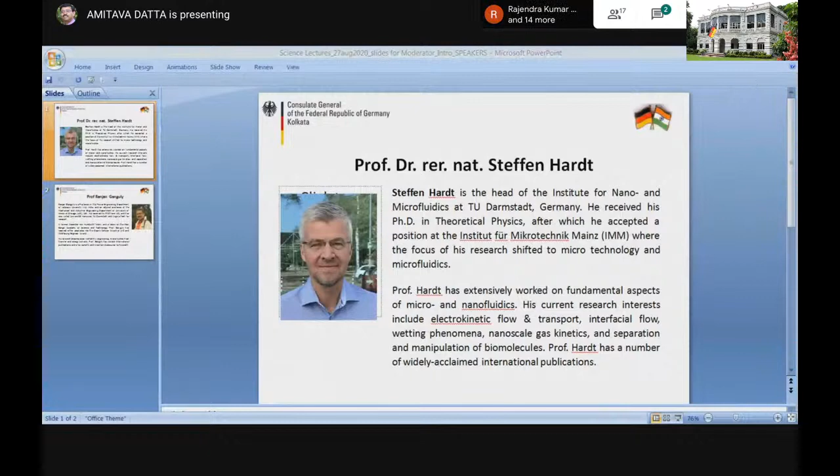Thank you very much for the introduction, and thanks to the organizers for inviting me to give one of the science lectures. I will start right away with my presentation, which is basically on fundamental aspects of surface tension. So let me do that now.

Okay. You should be able to see my presentation now. Is that visible? Yes. Very good. So I will start right away.

This is part one of the presentation, which is more about fundamentals. It's entitled Intriguing Effects Related to Surface Tension. Hopefully these effects are intriguing, and I will start by giving you some fundamentals about the physics of surface tension.

So how does surface tension come about on a molecular level? Imagine a molecule sitting in the bulk of the liquid. It has a number of interaction partners and attractive interactions with them. Compare that to a molecule sitting at the surface, which has less interaction, fewer attractive interactions with molecules, simply because it has fewer neighbors. This means you need to invest potential energy to bring a molecule from the bulk of the liquid to the surface. So a molecule at the surface has a higher potential energy compared to a molecule in the bulk.

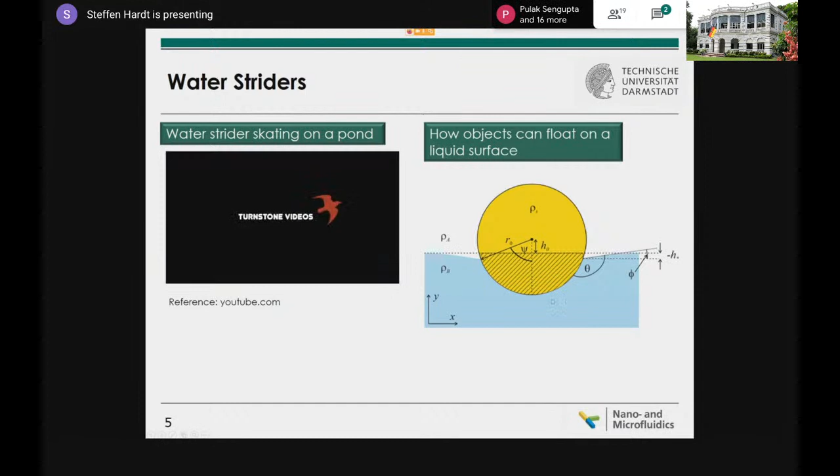This is basically a balance of three different forces. This is the gravitational force pulling the cylinder down. Then there's a buoyancy force - every body immersed in a liquid experiences a buoyancy force, this is force number two. Force number three, the main force here, is the surface tension force. It acts along the gas-liquid interface, pulling along this line which is tangential to the gas-liquid interface.

Because of the normal component in the y direction of this force, this body can float. This is actually what the water strider makes use of. But if you look at his legs more closely, he's a little bit more tricky than what that simple physics suggests.

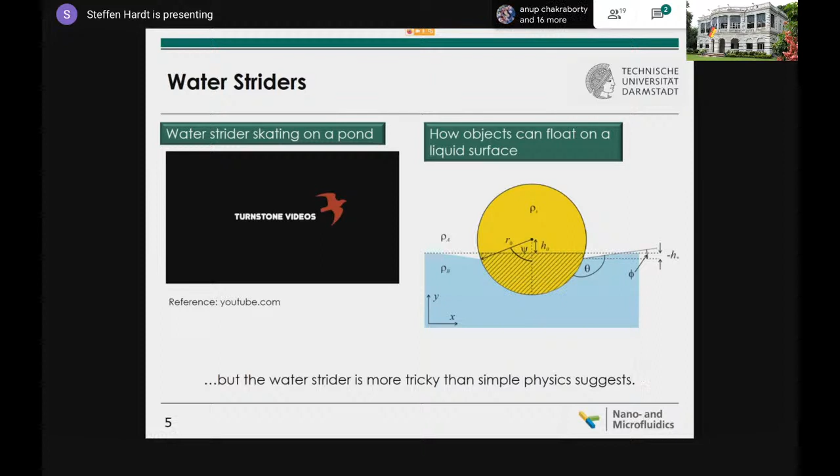For small animals, and for insects especially, it's really important to keep dry. If they are immersed in water, which can easily happen because of surface tension forces pulling them into a droplet, this can be fatal. So establishing mechanisms through millions of years of evolution to keep dry is really important for them. Quite recently, five years ago, there was a very nice publication on surface tension effects related to the legs of the water strider.

These authors took microscopic images of water condensation on the hairs of the legs of water striders. I'll play that video now—what you basically see is humid air, and from that humid air you see condensation of water droplets.

First, there's condensation at the tips of these small hairs, and then, because of surface tension forces, these drops get pulled down to the base of the hairs. But then you see something amazing—let's play that video.

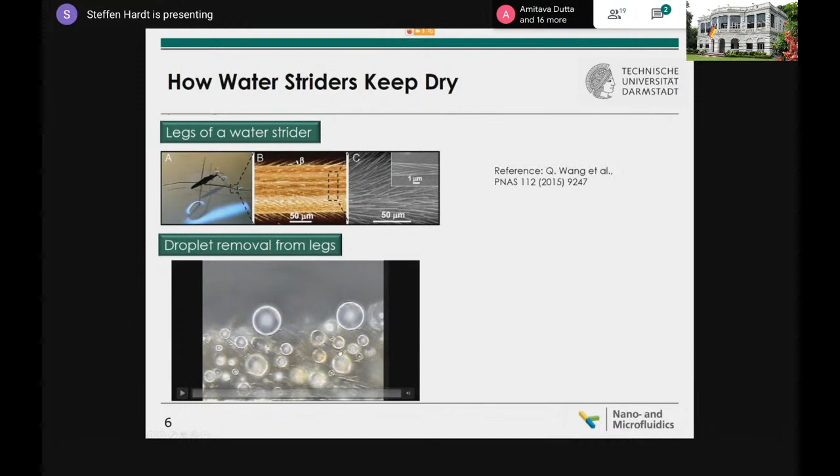So condensation—these small drops get pulled down, but then you see these larger drops grow and grow, and these larger drops get expelled from the forest of hairs. Let's play that again: small drops condensing, growing to be larger drops, and then getting expelled from the forest of hairs.

Why is that? What is the physical mechanism behind it? You can explain the physics like this: there are some drops, and this is a droplet that already gets expelled—it comes from the base of these hairs. When this droplet grows because of condensation, it accumulates more and more water.

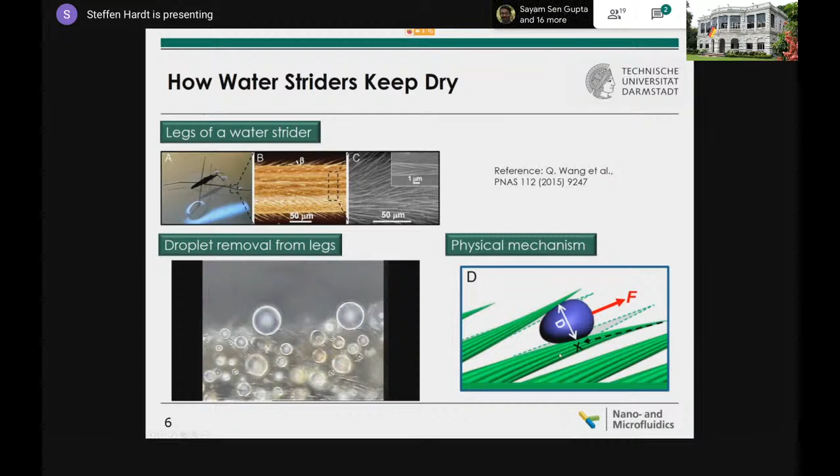Then the growing droplet would actually displace these hairs, and when they get pushed away, they form these conical structures, these conical bundles of hairs. Now imagine a droplet sitting between such conical bundles, with a surface tension force pushing that droplet out, because the curvature on this side is larger than the curvature on the other side.

Remember, the Young-Laplace equation tells you that because the curvature is larger here—meaning the radius of curvature is smaller here compared to there—the pressure here is higher. So the droplet is going to be pushed out, and this is exactly what a water strider likes, because it wants to keep dry.

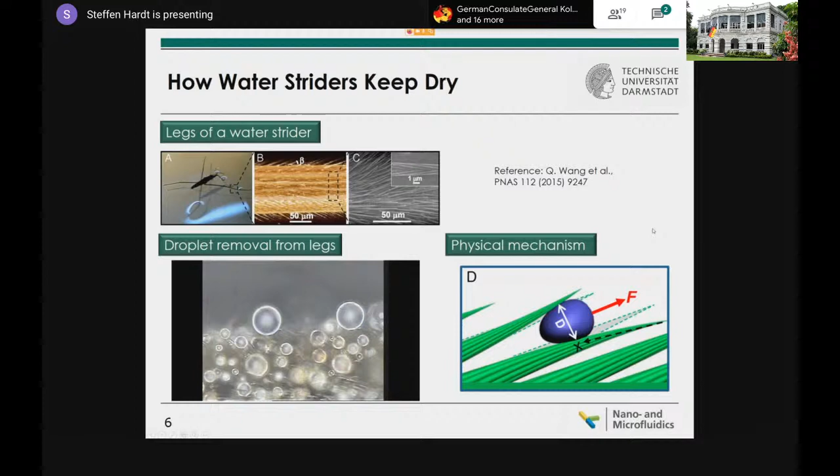So that's one of many examples of natural surfaces that occur in nature with interesting wetting properties. Definitely the most famous example of these nature-inspired surfaces is the surface of a lotus leaf.

As a result, as you all know, the lotus leaf is really good at making water droplets roll off from its surface—droplets roll off really easily. This is biologically beneficial, keeping these leaves from getting wet, and this is actually found for many other types of leaves as well, though the lotus leaf is a particularly nice example.

So this headline tells you 'nature-inspired surfaces.' What does that mean? Basically, around 30 years ago, scientists and engineers thought: why not copy this?

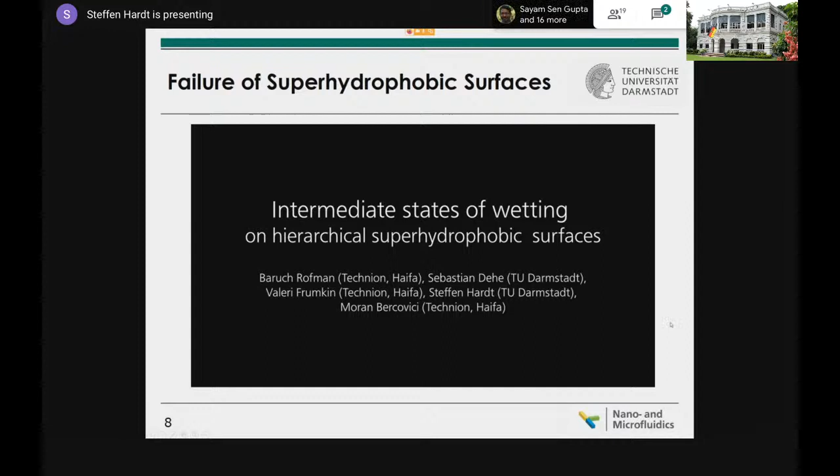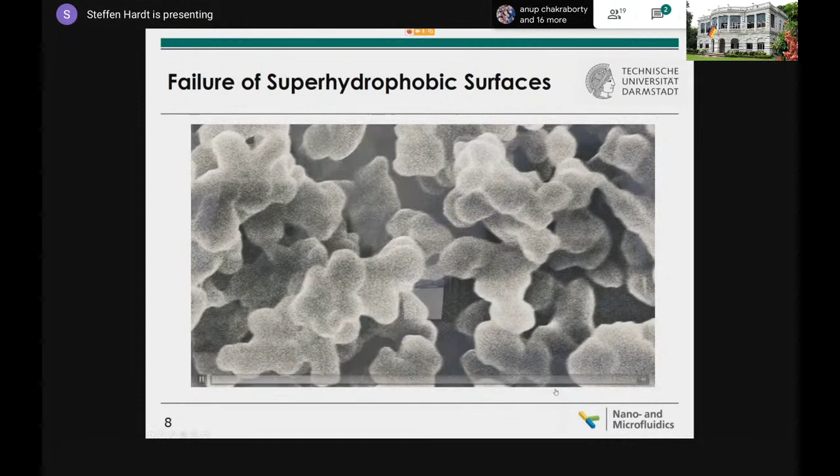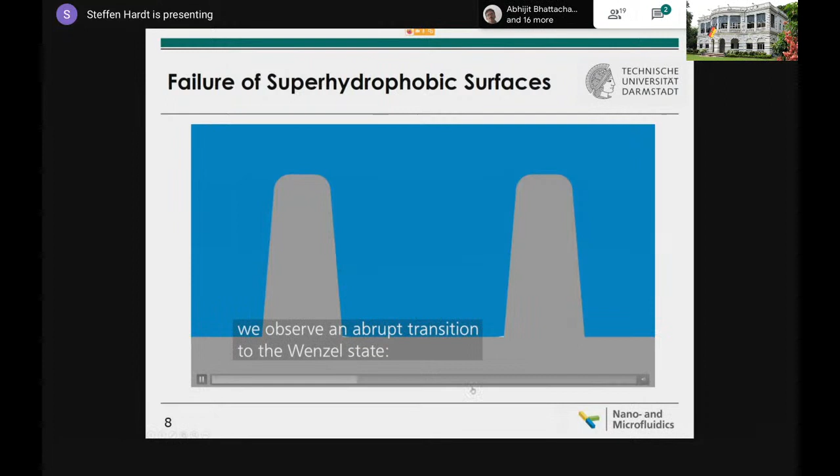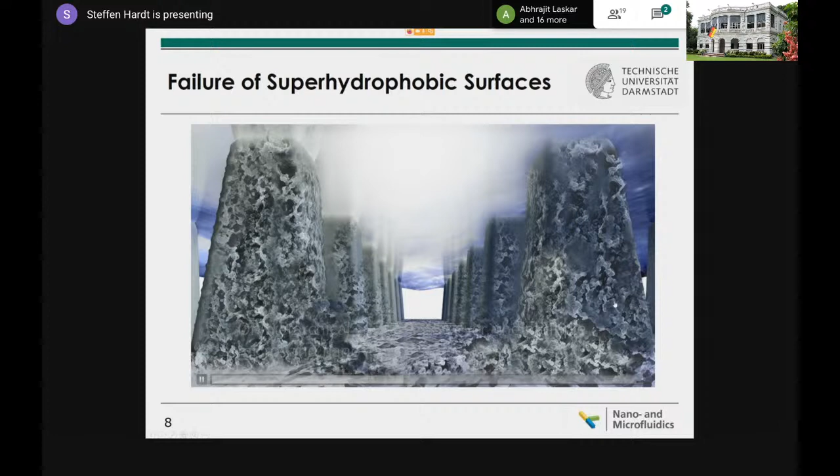We use electric forces for this, though it doesn't matter what type of force you use—you can also use mechanical forces. Using electric forces, you can induce the so-called Cassie to Wenzel transition. This is a surface without nanoparticles, and what you see is the transition to a Wenzel state. It occurs rapidly and everywhere.

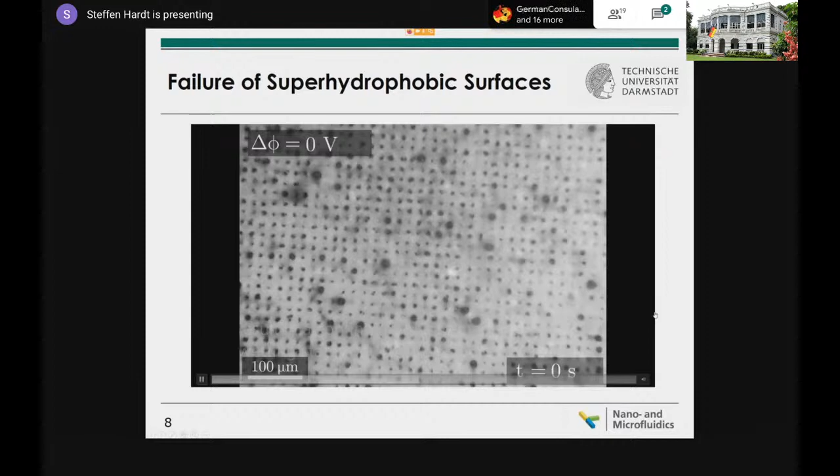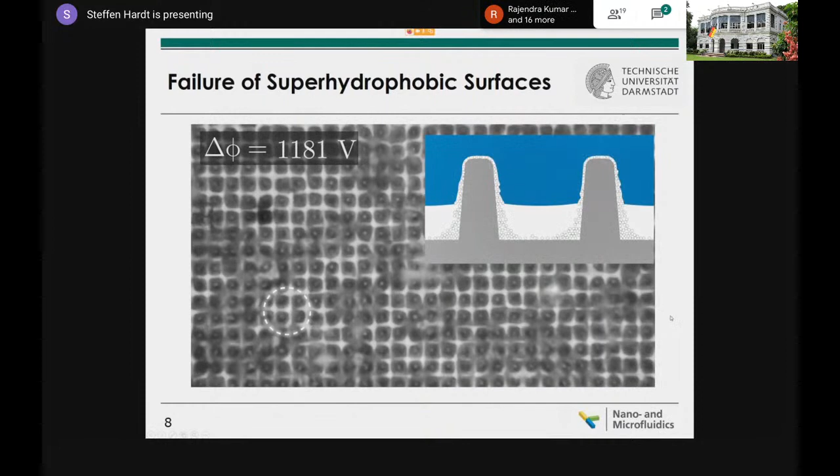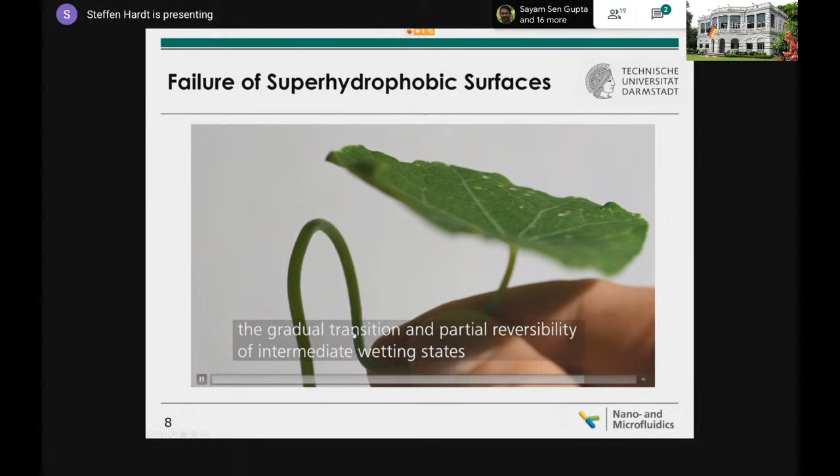Now compare it to the decorated structure—the transition is totally different. It occurs locally, and the most interesting thing is you can reverse it, at least partially. You switch off the voltage and it goes back to the original state, which is really beneficial. For the undecorated surface without nanoparticles, this wouldn't happen. So these surfaces are much more robust—if you want a surface that is mechanically stable with respect to this Cassie to Wenzel wetting transition, you better decorate it with nanoparticles, giving a hierarchical surface that is reversible, as shown here.

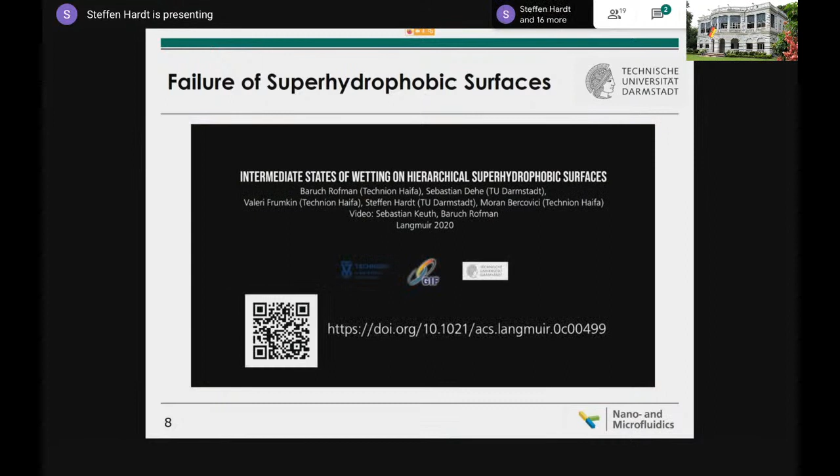The Cassie state is what you need if you want a droplet to roll off easily. This has been published in Langmuir quite recently, so if you want to read the paper, I would be happy about that.

But this doesn't solve all problems. If you want to render a surface mechanically stable with respect to the Cassie to Wenzel transition—again, you want to avoid the Wenzel state—usually you can employ nanostructures. In our case it was micropillars decorated with nanoparticles, but you can also nanostructure a surface right away, for example a surface consisting of nanopillars, as shown in that image.

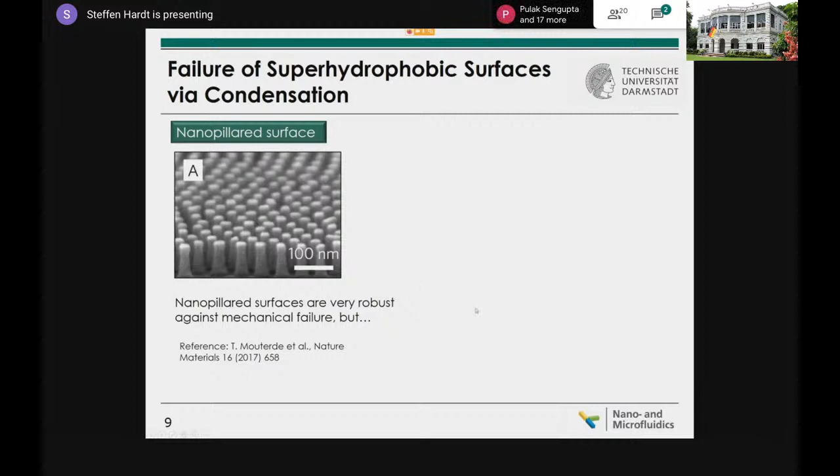Then you can look at the failure modes of that surface. Again, you want to avoid wetting of the interstitials. But there's a different mechanism that can induce wetting of the interstitials: condensation. Imagine you bring a warm or hot droplet onto that surface—there's a temperature gradient, a temperature difference between the liquid and the surface.

Or you can also imagine that you cool your surface. You have a droplet at room temperature and you cool your surface. So what will happen then?

Remember what the water strider did. It had hairs on its legs that could form conical structures. Imagine now you have a surface like that, no longer flat but with conical nanostructures. Similar to the water strider, we'd expect a droplet can be expelled from the interstitials because of surface tension forces, building up a high pressure that expels droplets from the surface.

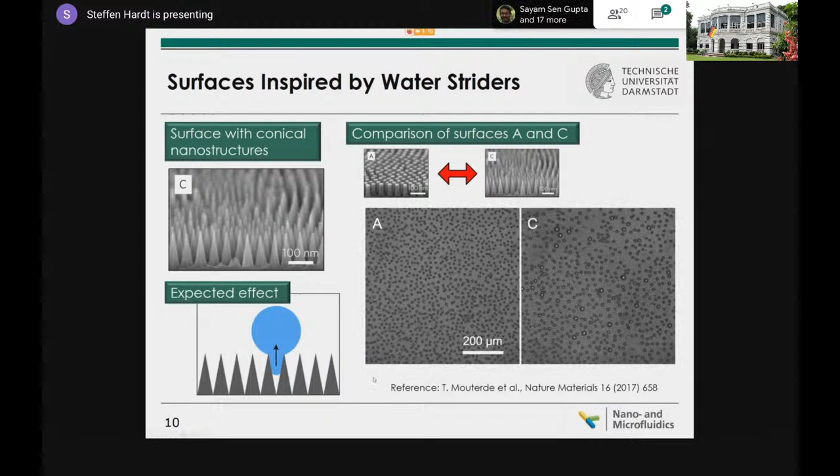Now you can do a test, an experiment comparing this surface, surface A, to surface C, where you let liquid condense on the surface. You can imagine a droplet at room temperature and you cool down the surface, and then see what happens. Surface A is the normal nanopillars, and these are the cones. You see distinct differences between these two images.

The most distinct difference, if we let this video play a bit longer, is that you don't develop larger droplets here. When these droplets reach a certain size, they become expelled from the conical nanostructures just because of this effect. And here, where you don't have conical nanostructures, droplets can grow to a very large size.

So if you want to keep a surface dry, just like the surface of the legs of a water strider, it's a good idea to have conical nanostructures. In the case of the water strider, these conical or microstructures are formed dynamically.

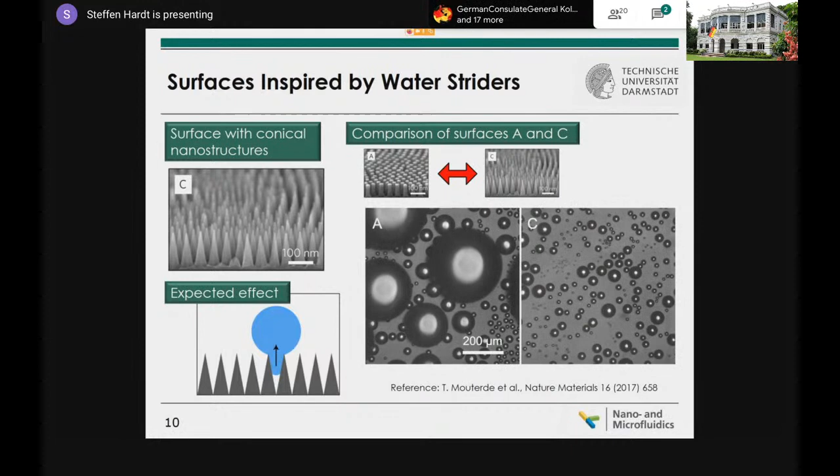Okay, I think that's quite intriguing. So far I have more or less assumed a single component liquid. I haven't talked about liquid mixtures or something like that. Now let's look at what can happen in terms of surface tension if you have a liquid mixture.

So you have a container filled with a mixture of liquid, and it's not really mixed. You have one component here and another component there. Let's imagine these two different liquids, say alcohol and water, have different surface tension. So when we look at a point at the liquid surface, you can imagine that the surface tension pulls on that point.

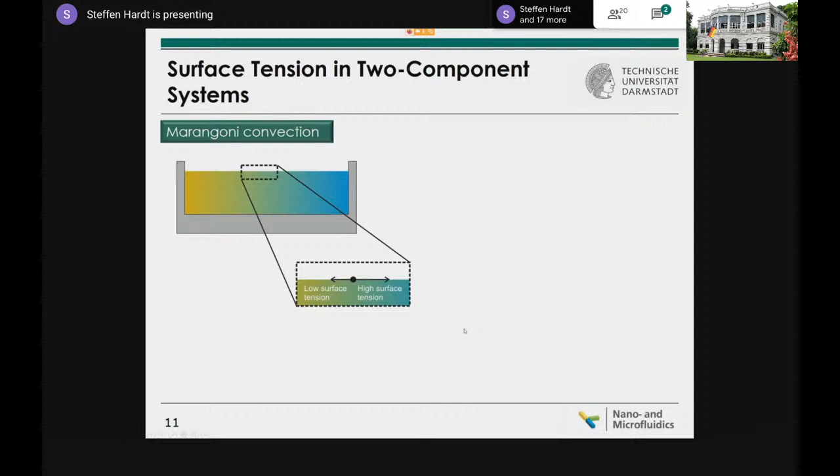This is the point we consider now. There's a large pull to the right because of high surface tension, and a small pull to the left, which means there's a net force on this point, and this net force will actually displace liquid. It induces a liquid flow, and that flow is called Marangoni convection, which is really observed.

Basically, the liquid will go to the regions of higher surface tension, and it's well known that you can do that in two different ways. You can have Marangoni effects based on concentration gradients, which is what I show you here, but also temperature gradients work as well.

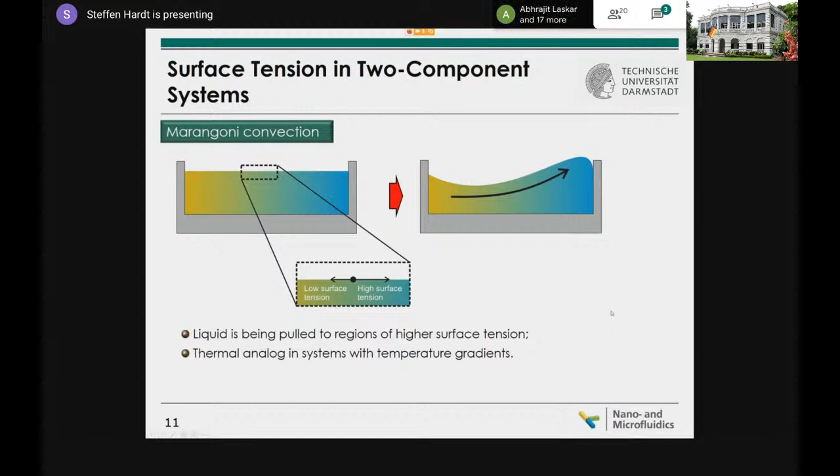This is related to an effect some of you have probably observed. For those who enjoy alcoholic beverages, you've perhaps recognized this tears of wine effect. When you have an alcoholic beverage with alcohol content maybe between 15 and 20%, close to the optimal alcohol content, you can sometimes observe this: you have a glass with an alcoholic beverage, you somehow wet the walls of that glass, and then you observe tears running down. These are tears of wine, and they are caused by the Marangoni stresses, the Marangoni convection effect.

What is the physical explanation of that? It goes like this: first, the wall is wetted here, and there's preferential evaporation of the liquid mixture close to the three-phase contact line. If you have an alcohol-water mixture, because alcohol evaporates more easily than water, you get enrichment of water here, so you have a higher concentration of water close to the contact line compared to the bulk.

This induces a pull, the same mechanism as on the slide before, so liquid is being pulled up. When liquid is pulled up continuously, it forms these bulges. Then the liquid remembers that there's actually gravity, which pulls these tears down, and this appears as tears. This is called the tears of wine effect, caused by Marangoni convection, Marangoni stresses.

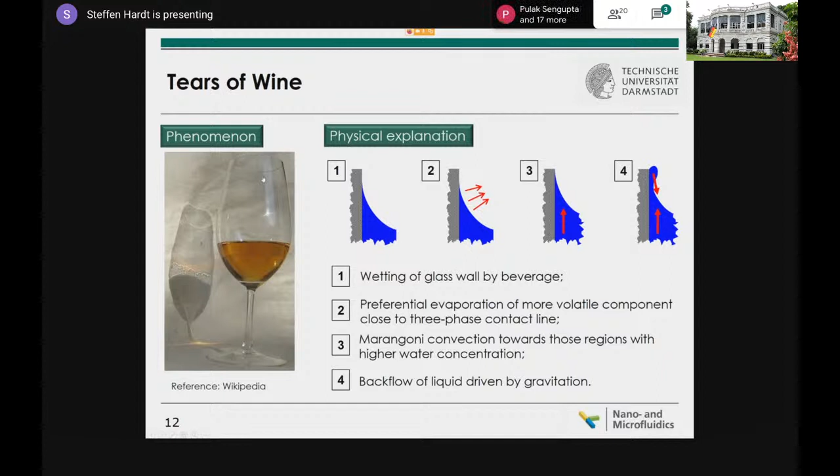What we did in our lab, we looked at this tears of wine effect under confinement. Imagine you shrink the diameter of this glass to 1 millimeter - we wanted to see what happens then.

This is our glass here, and to make this effect more pronounced, we have a mixture of alcohol and water in some pool. We dip a capillary with inner diameter around 1 millimeter, sometimes a little smaller, into the mixture, and we have a heating block ramping the temperature up to 80-something degrees, giving uniform temperature here. Then we observe really funny phenomena.

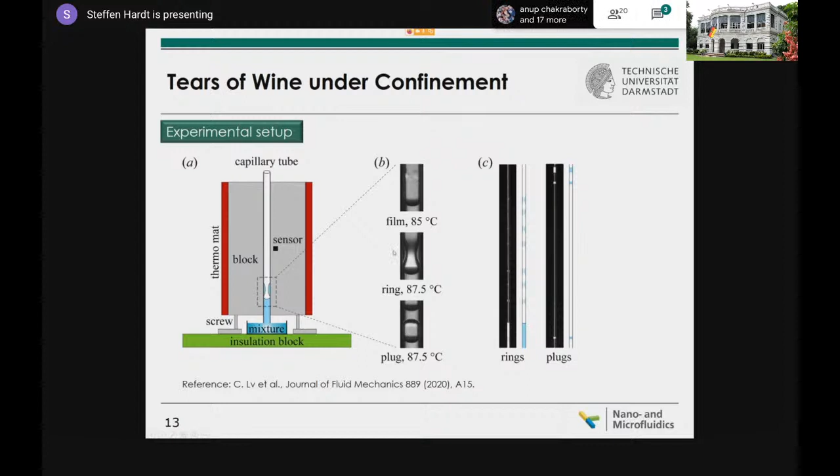In some cases we observe liquid rings here, similar to the liquid ring you saw on my second slide, and sometimes we observe liquid plugs. We sometimes see that a liquid ring transforms into a liquid plug.

What happens then, finally, I will show you in this video. This is a liquid ring here - you see it, with the meniscus oscillating a bit. Then suddenly you see that this liquid ring collapses and moves up. We have really analyzed it quite deeply - it collapses because the solution of the Young-Laplace equation has a stability limit, becoming unstable when a certain volume is exceeded.

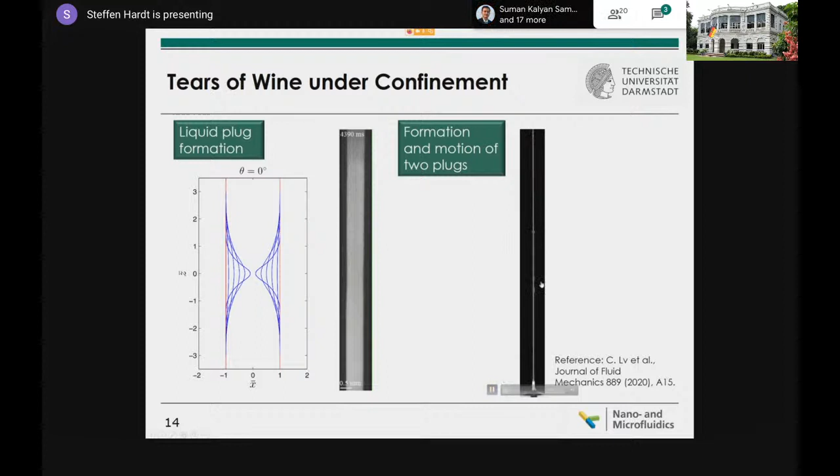If you look at the whole capillary, you can see quite funny effects, though it's a bit difficult to see because these liquid rings are really tiny - but let's play that video. You see one liquid ring here, one there, and then these liquid rings transform into plugs. These plugs move up because of evaporation, since there's gas or vapor generated here, and this pushes these rings out. So tears of wine under confinement is a completely different effect compared to the usual tears of wine in a macroscopic glass. This is also published - recent work we published in Journal of Fluid Mechanics this year.

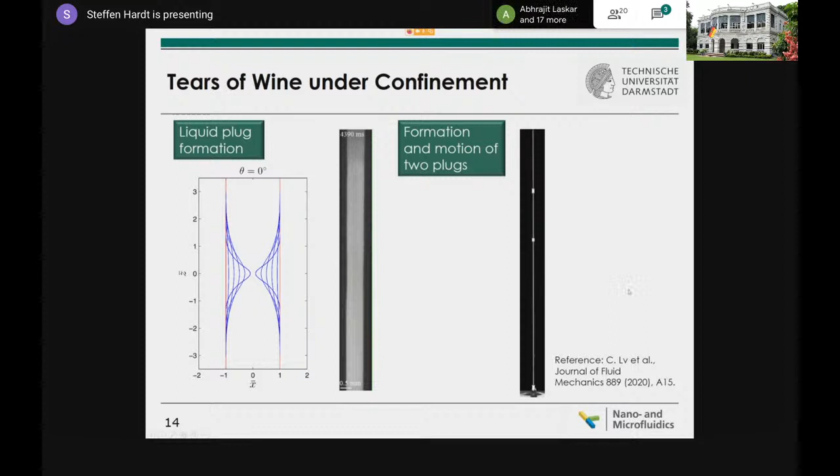This brings me to my conclusions and outlook. These are quite general conclusions: surface tension is ubiquitous in nature, but not only in nature, also in industrial processes and future industrial applications - Ranjan Ganguly will tell you more about why surface tension is an effect we can really exploit. But also in terms of science, if you look at the history of science, many important scientific developments are in some way related to surface tension. You would expect that since the Young-Laplace equation is 200 years old, this might be an old-fashioned research area. It's really not, because a large number of interesting results and developments date back to the past few decades.

There are also a lot of open scientific questions in which surface tension plays a role, also in our lab. For example, what I showed you, tears of wine under confinement, is something we discovered quite recently. I think nobody knew about that before.

So if you want to enter this research area, I think it's still a modern research field, even if the foundations are already 200 years old or so. And it relates to applications. A better understanding of surface tension related phenomena is key to a number of emerging technologies, and established technologies. This will be conveyed to you by Professor Ranjan Ganguly in part 2 of this presentation.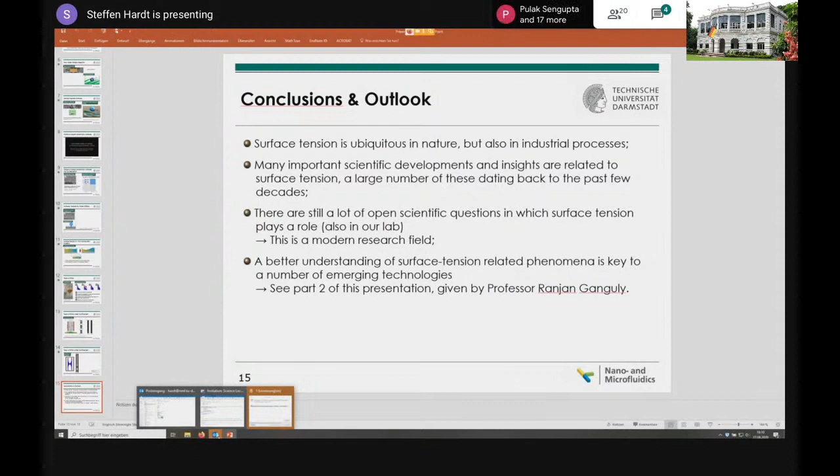Thanks a lot. Thank you, Steffen, for the nice presentation. You have shown some of the beautiful phenomena that happen in nature, like why beads form on the lotus leaf, and how water striders move on water, they walk on water. You have also shown the importance of the surface structure, presence of nanostructure or microstructure. These are very interesting.

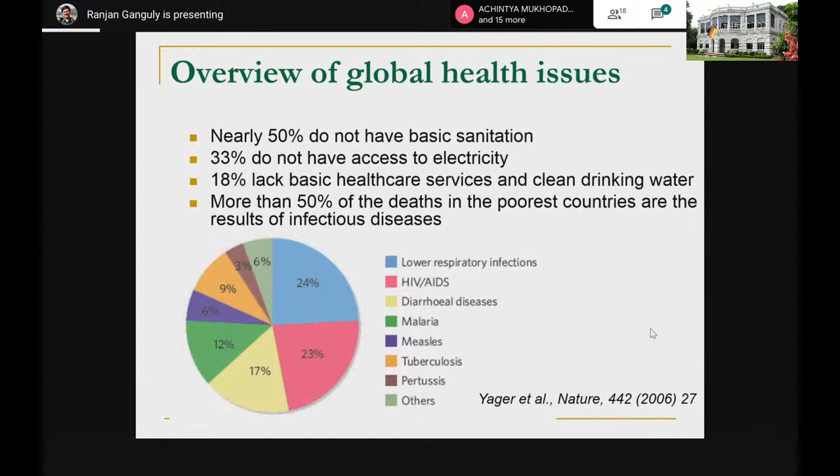These data are kind of dated, but the figures have not changed much since 2006. Nearly 50% of the population do not have basic sanitation globally. 33% do not have access to electricity. 18% lack basic healthcare services and clean drinking water. The most unfortunate thing is that more than 50% of the deaths in the poorest countries are results of some infectious diseases that are listed here.

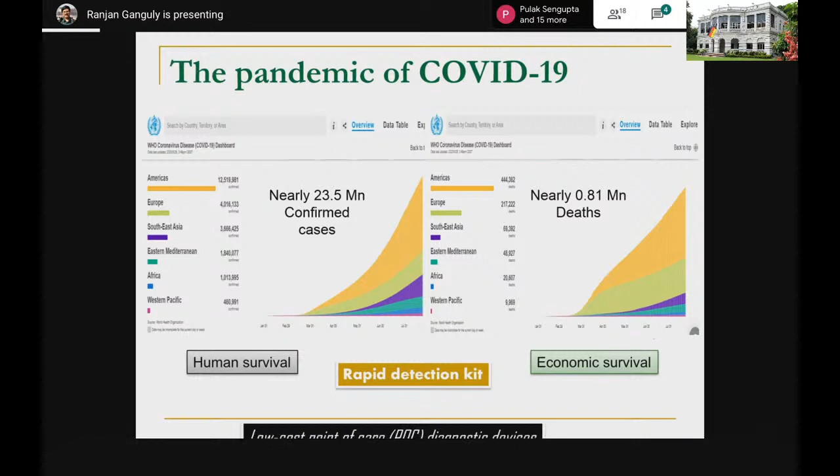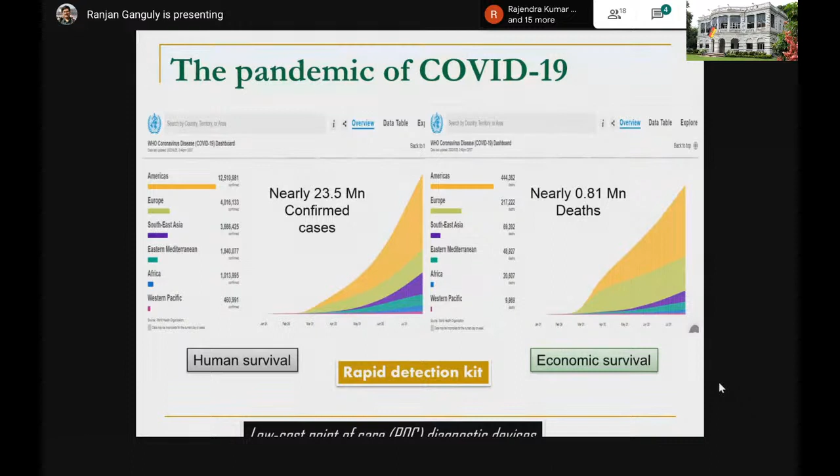To add to that, the entire world has now been brought down to its knees with this pandemic of COVID-19. With almost 24 million infections and nearly 1 million deaths, we are struggling to strike a balance between human survival and the survival of the economy. One tool that has come up, or is being projected as a prospective candidate to bridge the two, or rather balance the two, is a rapid detection kit. Such a detection kit essentially pivots on a technology known as point of care diagnostic, or POC, and a low cost POC for this large population to be catered.

So this virus, we're probably all almost experts by now through WhatsApp and Google about this virus. And we already probably know what this immunoassay is. These immunoassays are essentially a chemical protocol where we leverage the binding between the antigen and antibody. This rapid antibody diagnosis kit relies on the fact that in blood, upon infection, there are two types of antibodies, immunoglobulin G and immunoglobulin M, which are present. The presence of this IgG and IgM varies with time, depending on the occurrence of the infection, or the duration from the first occurrence of infection or symptoms.

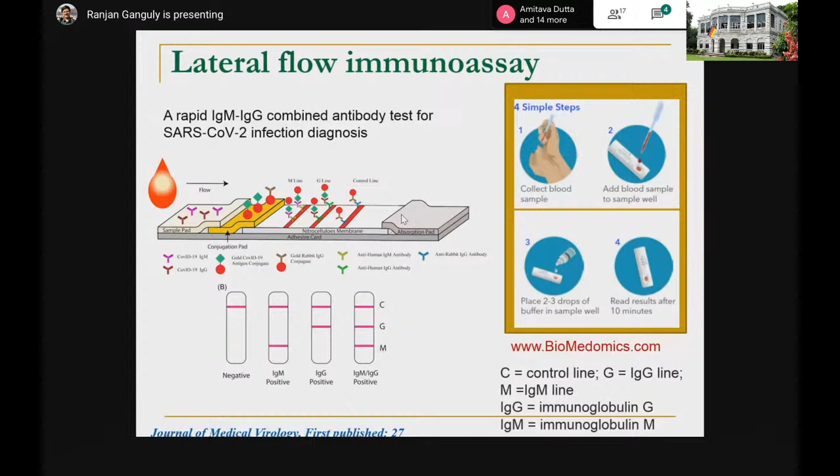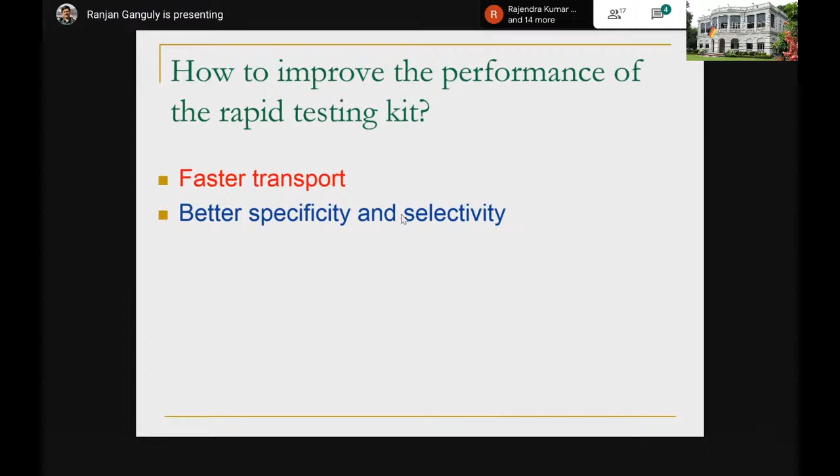We all know that these diagnostic kits have their own issues. Of course, the selectivity and specificities are still debated, and that's why we take these results with a pinch of salt. And also the speed, which can always be improved. So we need faster transport and better specificity and selectivity of these devices.

For better specificity and selectivity, you can multiplex these tests. So for example, instead of one droplet feeding to one detection channel, if you can do multiple detections, which allows you to do repeat tests simultaneously or test for multiple strains, you can reduce the false negative and false positive cases.

In order to reduce erroneous readings, you also sometimes need to mask out other competing molecules. For that, you need pre-treatment of the blood sample, which requires merging and mixing of liquids. And sometimes precise metered dispensing of the liquid on the chip - or rather a lack of that - leads to an error in reading.

So suppose a lateral immunoassay like that, an open strip of porous material - if we can impart all these features onto such a low-cost device, that gives us hope that we will get a better, more accurate, and faster reading. That's why we are now looking towards wettability to help us in this situation.

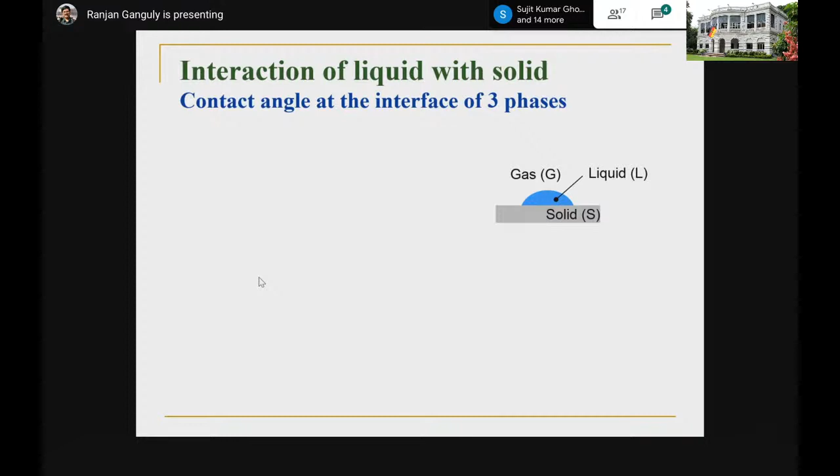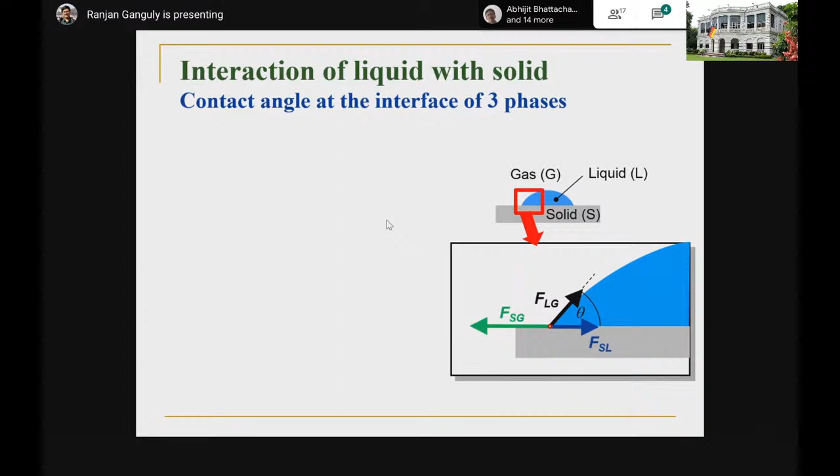Of course, Steffen gave a brief overview, so I'll quickly glance through this. Steffen talked about surface tension, and when a liquid droplet interacts with a solid surface, essentially the liquid, solid, and gas meet at a particular line, known as the three-phase contact line. At those contact lines, you have forces arising because of the surface energy per unit area of the solid and the liquid in presence of the gas.

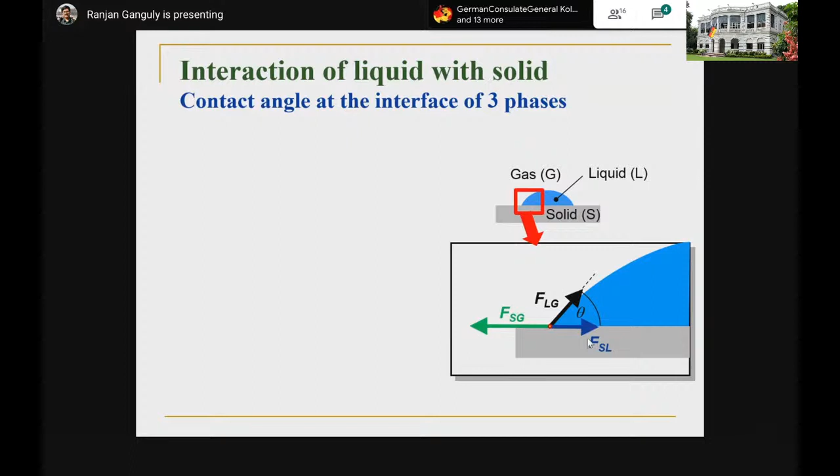If we take a corner point on the triple line, what we'll see is a tussle between the forces due to the surface tension occurring between the solid and the gas, liquid and the gas, and the solid and the liquid. When we balance the in-plane components of these forces, we get the well-known Young equation, which relates geometrically the contact angle - the angle that the liquid subtends on the surface - with the surface tension of the solid with respect to the gas, solid with respect to the liquid, and the surface tension of the liquid in presence of the gas.

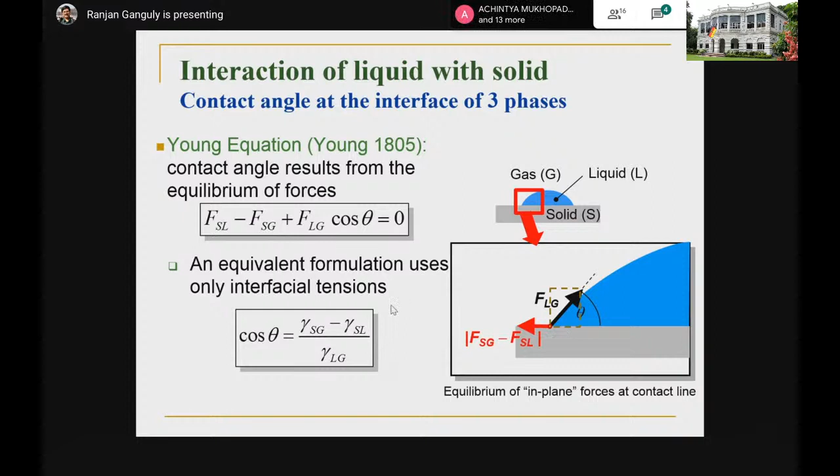This denominator is more commonly known as the surface tension of the liquid. So what it tells us is that the signature of these surface energies per unit area are actually reflected through the contact angle. Also, Steffen talked about the Laplace pressure.

If we have a droplet sitting on a surface under a curved surface, we have a pressure jump or a pressure buildup. A simple calculation shows that this extra pressure can be represented for a hemispherical cap in terms of the surface tension of the liquid and the radius of curvature. It clearly means that the smaller the radius of curvature, the higher the Laplace pressure developed, the extra pressure developed inside this liquid droplet. So smaller is better, stronger. I mention it because later in my lecture we'll see how it's leveraged.

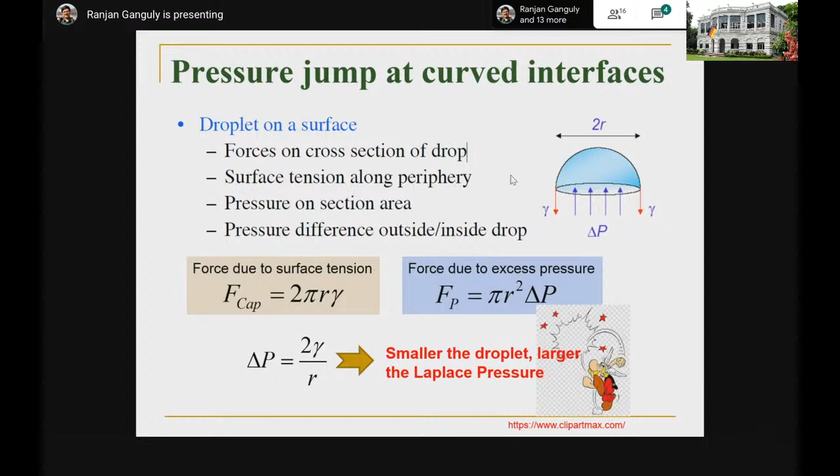Now, depending upon the mutual surface energy of the liquids and the solid in presence of the gas, the contact angle can be varied. For example, you get surfaces where the contact angle is very small, meaning the liquid almost spreads instantly on the surface - we call them superhydrophilic. Surfaces where the liquid sustains an angle less than 90 degrees we call hydrophilic. Surfaces where the contact angle is greater than 90 we call hydrophobic, and surfaces where the contact angle is very high, greater than 150 degrees, we call superhydrophobic. Nature has abundantly given us examples of these surfaces - the lotus leaf is one such example of a superhydrophobic surface.

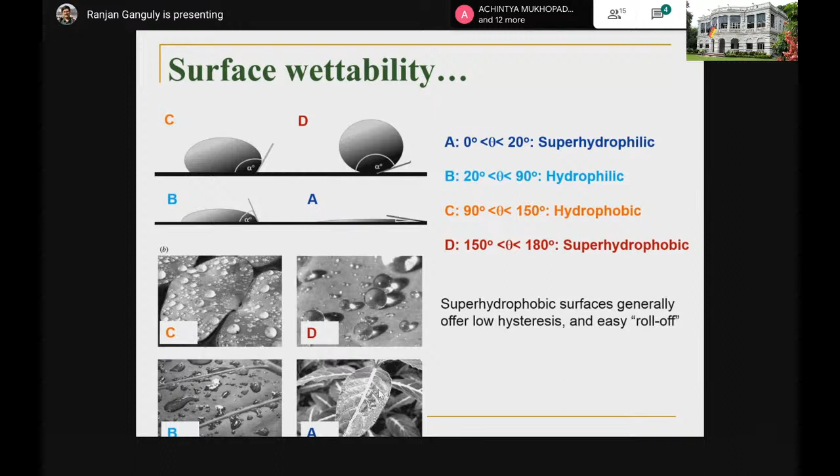Also, the contact angle definitely depends on the surface tension of the liquid. For example, in image A you see water sprayed on a leaf, but the water was surfacted because insecticide was sprayed, and for these insecticide sprays you want the tiniest droplet to spread over the entire leaf to the largest extent possible. So surfactants are mixed with the insecticides so that whenever you spray it on leaves, they spread almost uniformly over the leaf. What you see here is an insecticide sprayed leaf.

Now, surface tailoring is something we call wettability engineering. In surface tailoring, suppose we have a metal surface and I don't want water to stick on it - we can do several tricks to cover the material with a coating that gives us the desired wettability. For example, any material with high surface energy, like glass or metal, which generally tends to be hydrophilic, we can coat with materials like Teflon, fluorinated hydrocarbon, or other non-polar polymers to give them a hydrophobic nature. These coatings can be rendered through different processes.

For example, coating, plasma deposition, vapor deposition, micro-nano texturing - one such example Steffen highlighted in his lectures, sputtering, etc. Depending upon the texture, you basically need both texture and surface energy to get a desired extent of wettability. You can get the Cassie-Baxter state or Wenzel state, and it all depends upon the structuring that you get.

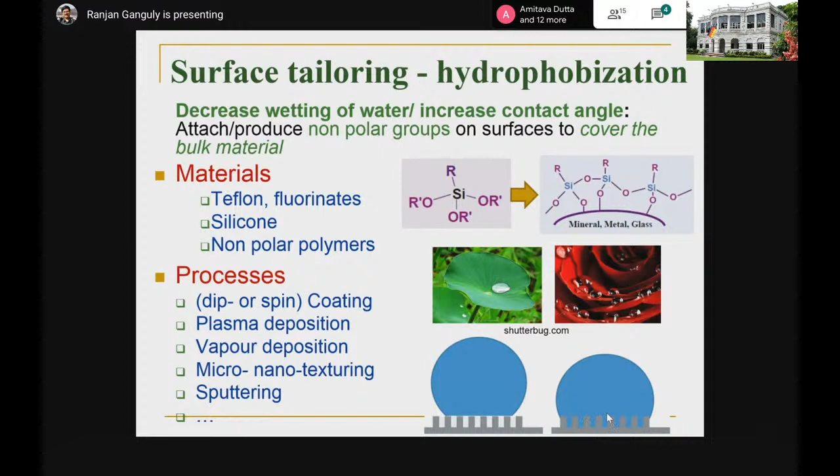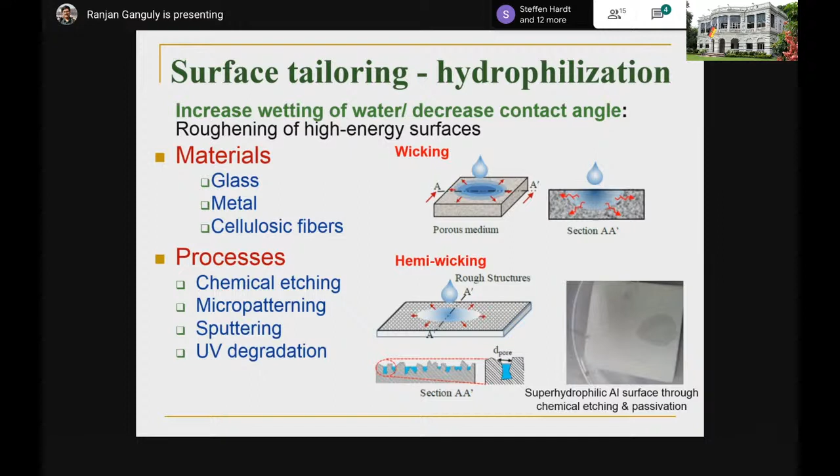You can get hydrophilic surfaces. Some materials are intrinsically hydrophilic, which has high surface energy, and if you render the surface rough, a high energy surface rough, it becomes super hydrophilic. Again, there are methods of generating this surface roughness, starting from chemical etching to micropatterning, sputtering. And the telltale sign of a surface being super hydrophilic is that whenever you dispense a liquid, it spreads almost instantly.

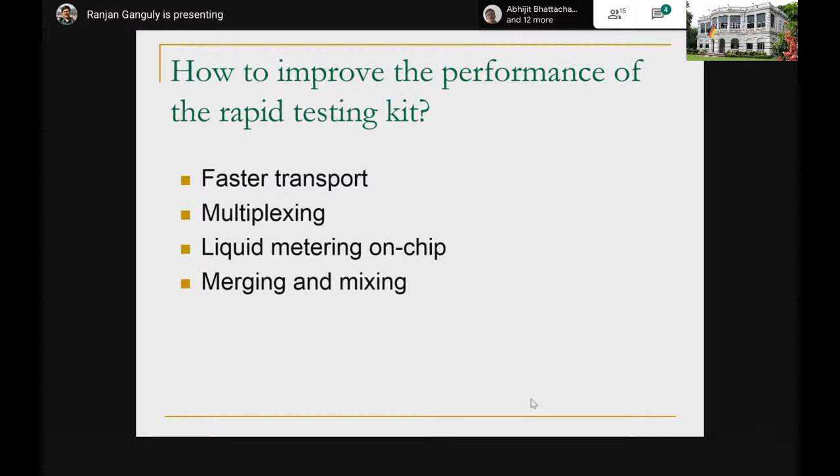So again, coming back to this point-of-care diagnostic device for SARS-CoV-2, we needed a device that ensures faster transport, allows multiplexing, enables liquid metering on chip, and merging and mixing. Too many things, but let's see if we can get there.

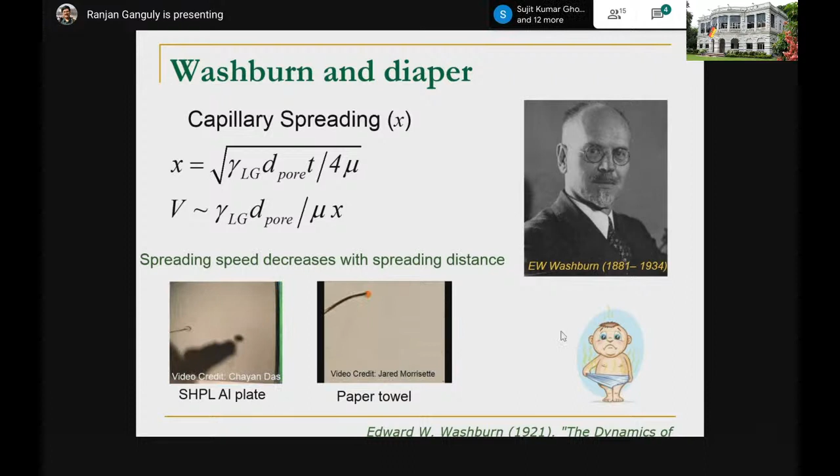The problem, again, as I mentioned, with these capillary-driven devices is that they are intrinsically slow. The transport of liquid, not only in the lateral flow immunoassay I showed, but in many other types of lateral flow devices, is inherently limited by the slow movement of liquid. This slow movement is actually prescribed by the American chemist E.W. Washburn, who suggested that the propagation velocity of the liquid front scales inversely with the distance of propagation, which means if a liquid starts spreading, the larger it spreads, the slower it becomes. And that kind of seals the fate of diapers also, let alone the POC devices.

So our first target was, can we surpass this Washburn limit of velocity? To do that, we did something similar to what Steffen showed you a few minutes ago. They developed a conical structure of hydrophobic surface.

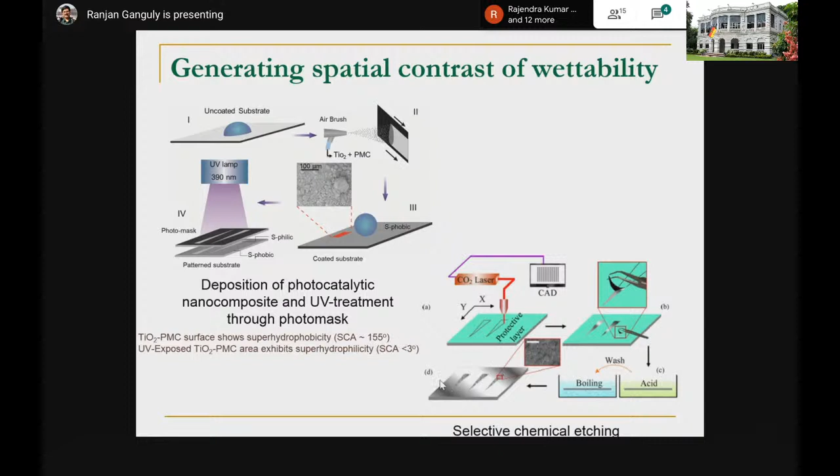What we did was develop not a conical structure, but a flat wettability pattern. We got this pattern through different methods, but to cut the long story short, we have a super hydrophobic surface, and on that surface we etched or deposited super hydrophilic tracks with a tapering structure, narrow at one end and wider at the other.

We have one such plate in front of you with these tracks. It's a horizontal plate, and this brighter, white part is the super hydrophobic area where you can see several droplets sitting, like droplets sitting on a lotus leaf.

At the moment we push a gentle tap, these diverging tracks are super hydrophilic. You can see vaguely some water already sticking, pre-suffused on this track because they were hydrophilic, and from prior experiments they already had water.

When we put a gentle tap on this plate, we found that the droplets disappeared almost instantly.

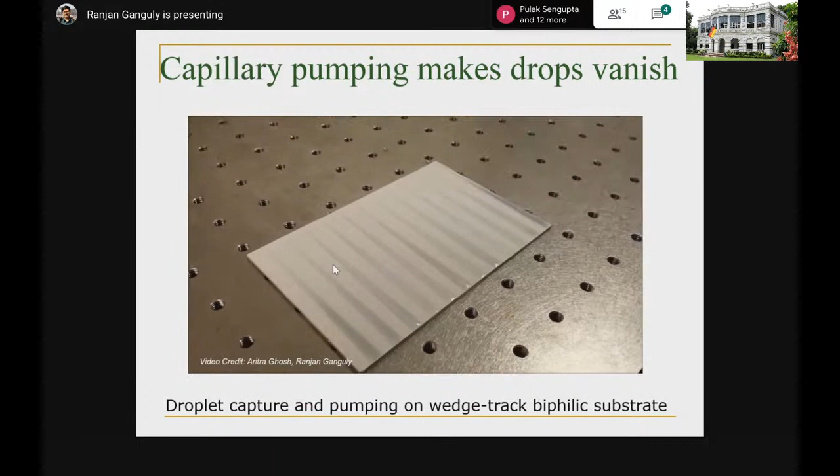To see what actually happened in a more convincing manner, we slowed the video by 250 times and realized that as we put a gentle tap on the plate, because of the inertia, the droplets actually slid over the substrate and eventually touched the tracks, which are super hydrophilic.

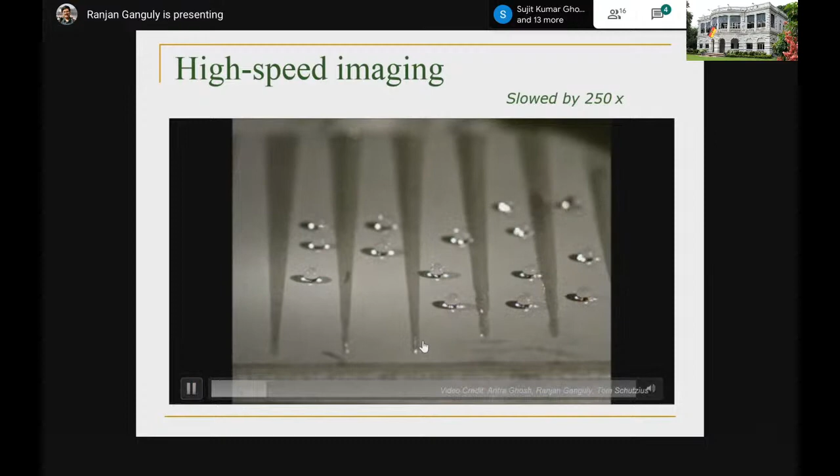Along the direction of the super hydrophilic tracks, which are horizontal, all the droplets moved from the narrower end to the wider end. The pumping we saw was so pronounced that none of the droplets could escape the tracks.

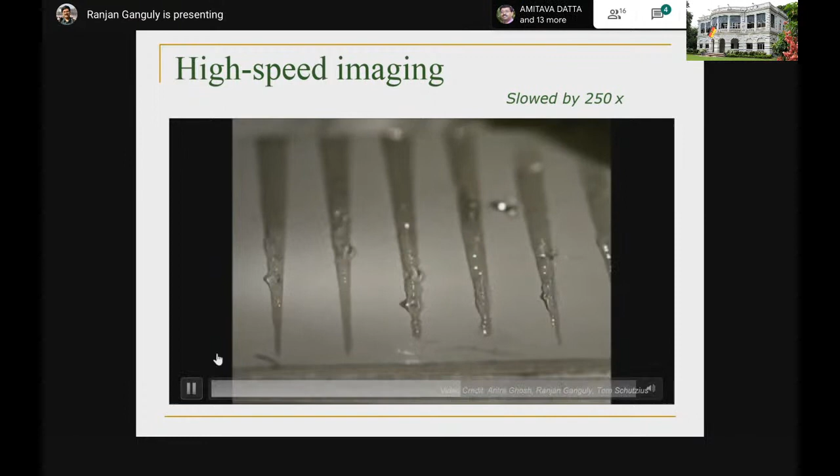How did it happen? We had alternating hydrophobic and hydrophilic patches, and there was a paper in Science which showed that if you have alternate patches of super hydrophobic and super hydrophilic regions and feed water to the hydrophilic tracks, you get to see ridges of liquid.

But if you increase the volume a little bit, at certain locations you get to see bulges of liquid because of some instability.

In our case, whenever we deposited sufficient water on the narrow end of the track, it created a bulge. The droplets which jumped on the track had a momentary bulge, and this momentary bulge looked like this.

As the bulge formed, it experienced a force in the downstream direction as the track widened. This is because of the Laplace pressure gradient, where the force at the contact point gives rise to a net forward moving force.

Roughly, the radius of curvature on the narrower side being smaller than the radius of curvature on the larger side creates a net pressure gradient which moves the liquid droplet in the forward direction. That's what you get under this footage.

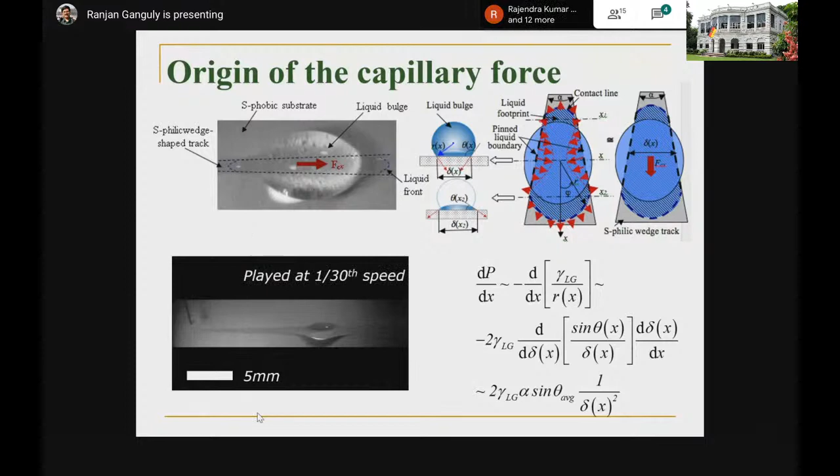This is slow moving footage, played at 1/30th speed, so this is how you see the droplet moving.

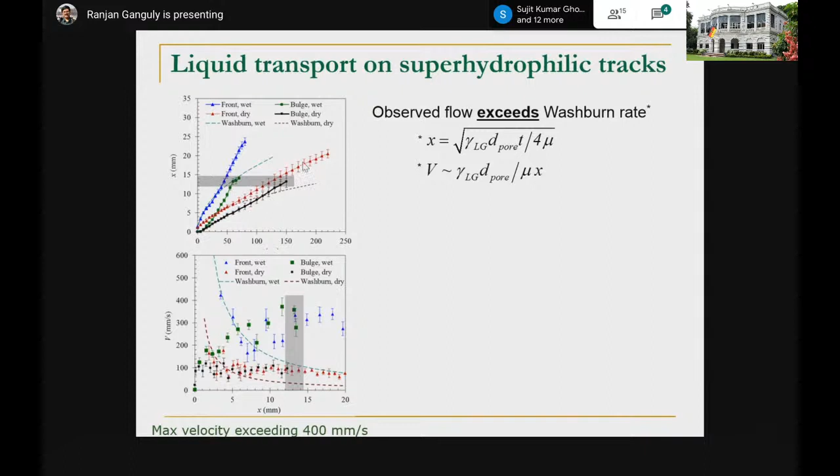Question is, do we exceed the Washburn rate? Yes. When we did the measurement, we calculated the Washburn limit of flow rate depending upon the pore size, or rather the surface texture morphology of that plate, and we still found that the liquid droplet actually overcame the Washburn rate, shown by this dotted line.

Of course, the rate or speed of this travel depends upon the roughness features, but that's a more detailed story. I'm not going to dwell on that today.

When you deposit these pairs of droplets, we saw that depending upon the design, we get a certain number of droplets being collected. They are transported because of this forward capillary force that you saw in the previous slides, merging together after a precise dispensing of liquids and collecting at a downstream location.

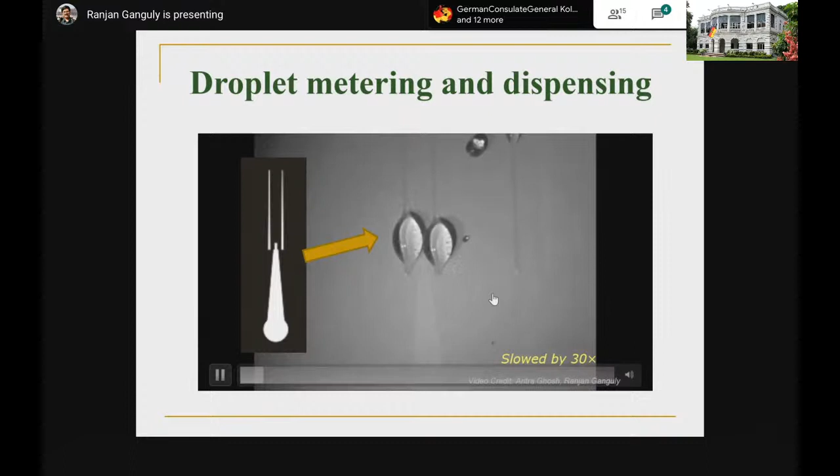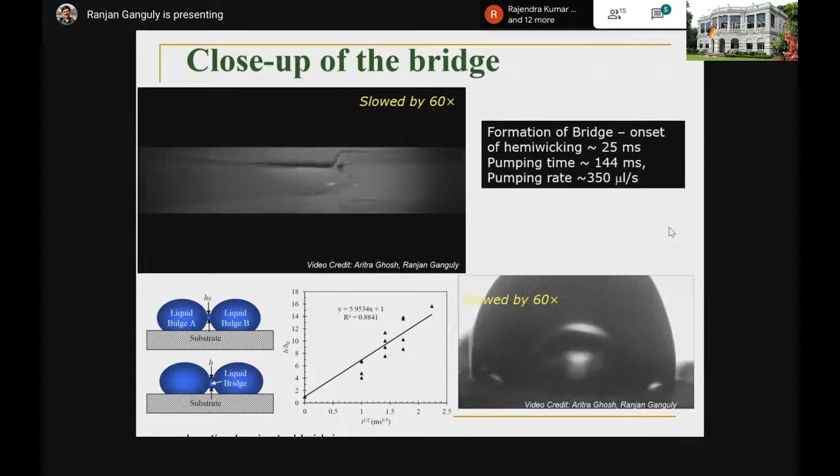And if you see it from the end, you can clearly see that there is quite a good amount of droplet inertia influencing this process, which also gives us an opportunity to have a good mixing. Otherwise, in a small length scale, mixing is something hard to come by. People working in the area of microfluidics are well aware of that.

So we decided to go for a little bit of improvement in the track design, and went for making a capillary driven...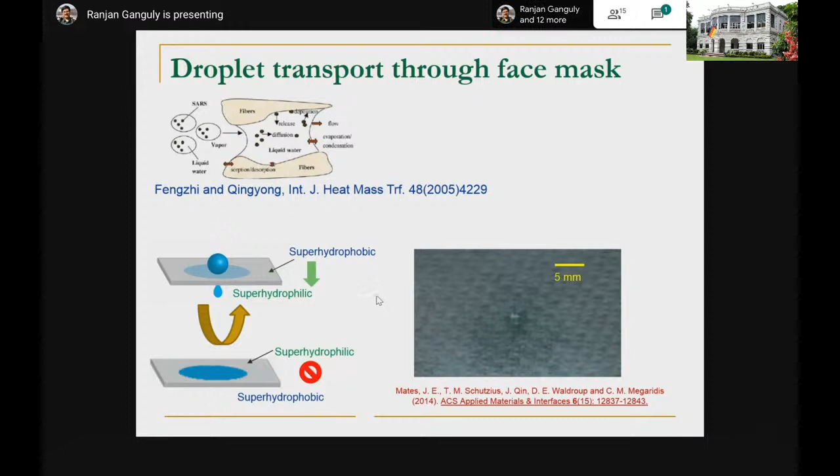And we tried to leverage this principle of liquid diode to make a face mask. We initiated the process during the lockdown when there was no mask in the market. So we decided whether we can use household materials like polypropylene bags lying at the corners of our house and a cellulosic fabric like the ubiquitous gamcha or a t-shirt to make a 3-layered mask.

What we intended to have is a hydrophobic layer, an inner intermediate layer which is hydrophilic, the cellulosic layer, and another layer which is hydrophobic. The principle of transport will be like this.

If you have a droplet which is coming at a high velocity and is impacting on the inner hydrophobic polypropylene layer, so the mask wearer is on this side, and if he or she sneezes, the droplet at a high velocity will impinge on this hydrophobic side.

And because of this impingement pressure plus the Laplace pressure, it will penetrate through this hydrophobic layer, and the intermediate hydrophilic layer will capture this liquid and it will spread. Further penetration of this liquid to the other side will not be possible because now we have a hydrophilic followed by a hydrophobic layer. So the water diode principle will resist a transport of the liquid from the inside to the outside.

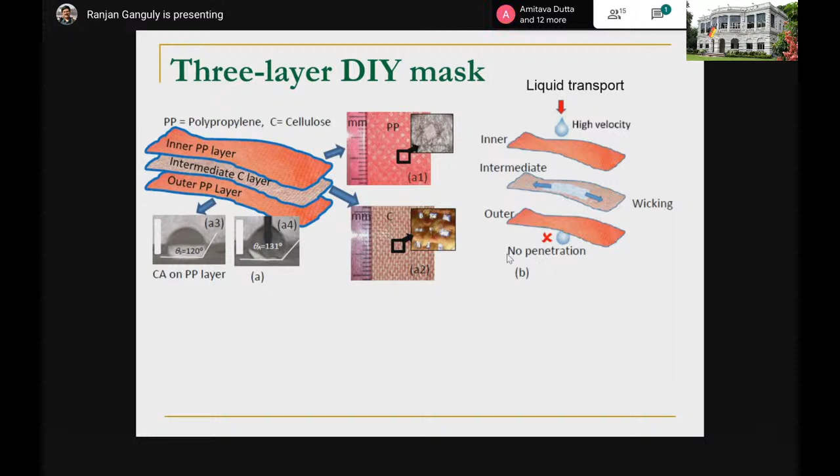What happens to a liquid droplet floating outside? In that case, the impact velocity from outside may not be high enough for this outer layer to be penetrated and to go inside. So we did a back of the envelope calculation, because the envelope was the only thing that we had at the time of lockdown.

The images and everything that we see are taken in a household, through a household kids experimental setup. We couldn't use our laboratory setups to measure the contact angles also.

We calculated depending upon the pore diameter and found out that the liquid droplet would be able to penetrate these fibers if we have a droplet impacting with a velocity greater than like 0.7 meter per second, which is the case when you sneeze. But generally, if somebody is wearing a mask and is walking, he or she doesn't encounter from outside a droplet exceeding a velocity like this.

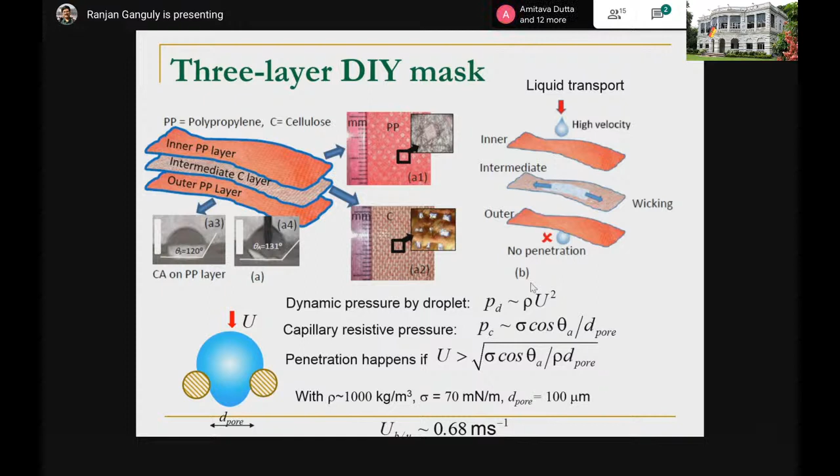So what you can get out of this 3-layered mask is that if the wearer sneezes or coughs, the droplets are arrested inside the mask, and the wearer is also protected from the outside droplet when he inhales.

We also tested our mask, the DIY mask, against a household spray test. We used a color to check whether the inner cellulosic layer, or the hydrophilic layer, was getting the liquid. Yes, we saw that when we sprayed the liquid on the mask and opened the outer layer, the intermediate layer was absorbing the liquid, and the penetration was zero in our case.

We put a shiny mirror on the other side of the mask and sprayed from a distance, and our mask didn't give any penetration. The mirror was dry, and we compared it with the surgical mask, which gave a penetration and the mirror was wet. This was a very crude experiment, but it still shows the efficacy.

This mask was developed under the leadership of our cast of Jadavpur University, which is an innovation cell, and it's being marketed also by one company currently.

There are a few other applications, and as I mentioned in the slide of Washburn law, he kind of sealed the fate of diapers. So there was another project in collaboration with UIC, and I was part of that collaborative work, where we tried to develop better diapers for Kimberly-Clark.

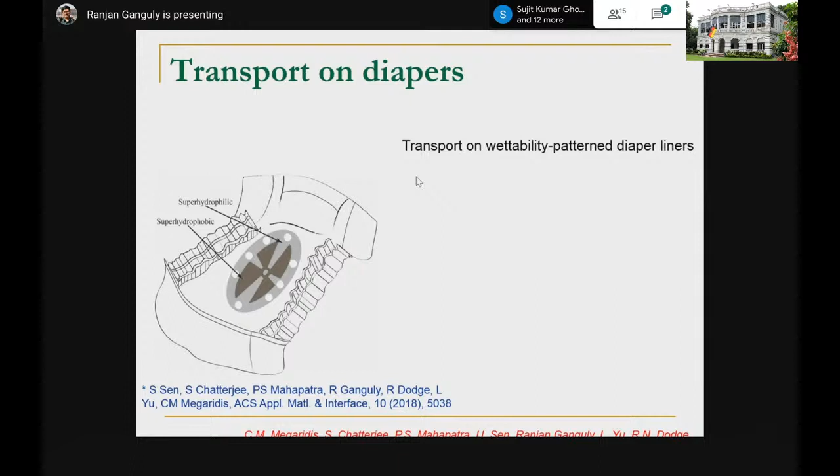I cannot show you the final design because of IP issues, but what we did was develop wettability patterning. I'll show you a movie. We wettability patterned the inner layer of the diaper, known as the liner, and tested it under a highly enhanced scenario of very strong jet flow, called an insult. For an insult flow rate of 1100 milliliters per minute and a duration of 2 seconds, the wettability pattern could confine the liquid sprayed, leading to very good absorption.

I'm sorry, am I still visible? My PowerPoint's just crashed. Okay, I'm almost at the end of my presentation. Something wrong happened, just bear with me for a second. Yes, I think the movie kind of crashed the system.

So how am I doing with time? Yes, you have some more time. Okay, I have... it's trying to revive, it's not closing for some reason. Let me see.

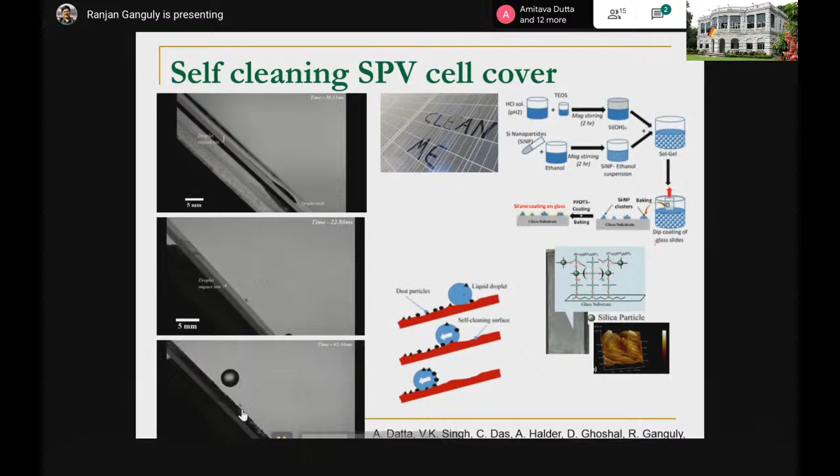So the glass surface was super hydrophobic, and as you can see, under impact of minimal water, the liquid enabled self-cleaning behavior, rendering the surface self-cleaning. What it did was pick up the dust from the surface, and as it rolled down, it picked up the dust and rendered the surface clean.

It was pretty well visible or quantified when we compared the surface with a regular glass surface. What we saw is that with the deposition of the coating, the initial transmissivity suffered a 4% drop, but with dust being deposited, and after cleaning, the transmissivity of the coated glass surface was more than the uncoated surface. So there was about 25% improvement in transmissivity recovery upon cleaning when we had self-cleaning SPV cell covers.

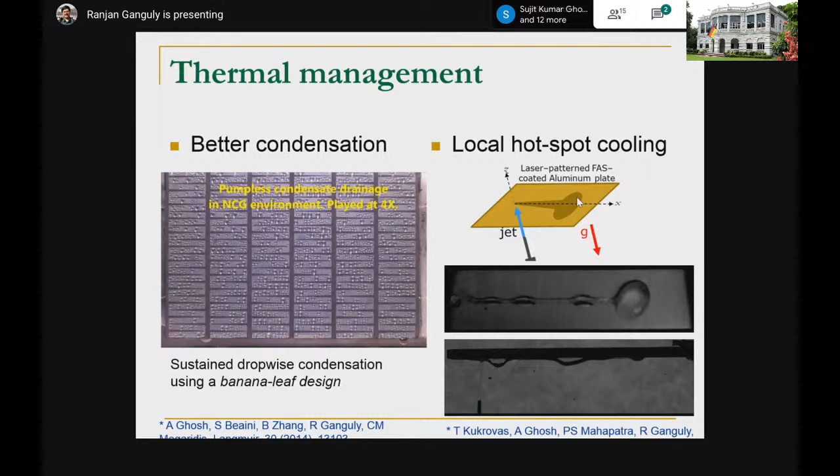There are several applications of this wettability patterning, such as to enhance dropwise condensation on a surface. This is analogous to what Steffen showed you. He showed on a 3D structure where they were able to repel droplets as they came out of the structure. Here, what we did was remove condensate droplets regularly using these planar wettability patterns, or even guide them to follow a path, which could be used for cooling electronic devices with local hotspots. The application areas are multiple, and we are continuing to work on them.

I'd like to thank my team, which comprises at JU, Professor Amitava Datta in my department, Professor Debojyoti Ghoshal, who was involved in this solar photovoltaic cell coating, and the entire JU cast team for the mask, and my students. And of course, for a large part of the work I showed, it involved my collaboration with University of Illinois Chicago, Professor Constantine Megaridis and his team. I'd like to thank them as well, and finally, I'd like to thank you all for participating in this.